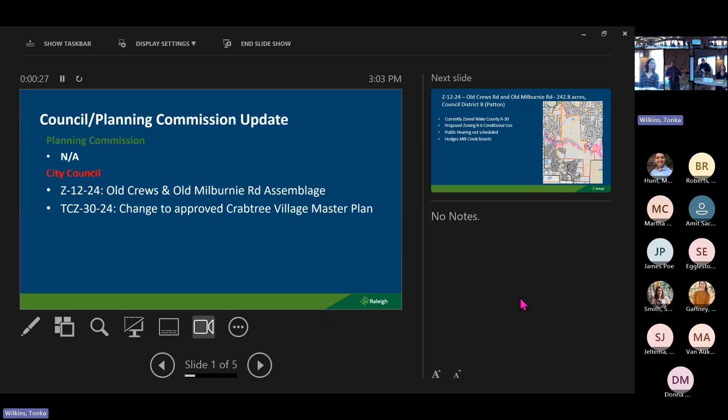I haven't seen the one we talked about last month. It's in the Falls Lake watershed, so that's on our list as far as either planning commission or city council. But the first one, Z-12-24, is just a large assemblage of land. I think it'd be nice to put on the commission's radar, it's about 240 acres. We don't want to see something like that happen without oversight. The other one is a change to an approved master plan, likely a zoning case with more conditions, which is right behind Crabtree Valley Mall.

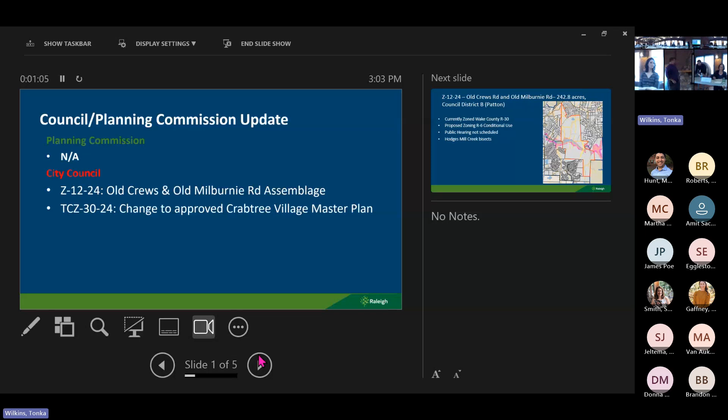So the large case in East Raleigh is off Old Crews Road and Old Milburnie Road, 242 acres, in District B, which is Councilor Patton's district. It's currently zoned in Wake County, so it would have to be annexed as well. Their zoning designation is about R30, which is based on 30,000 square foot lots. The public hearing has not been scheduled.

It's supposed to be scheduled for the first public hearing in March, but the applicant asked for that decision to be deferred to the next council meeting on the 18th of February. So it could be scheduled sometime in March, but it'll probably be an evening public hearing. There's a large creek, Hodges Mill Creek, which bisects the property and has a lot of floodplain, along with some other streams coming down.

I just want to bring this to your attention. 243 acres, nothing really to sneeze at. I think we're going to have issues with fire coverage and things like that, not necessarily stormwater issues, but we wanted to put it on the radar.

Question: where is that within our urban growth boundary? I believe it's in the eastern growth category because it's still ETJ, in the county. I think they just finished a study on it last year, part of that eastern growth pattern study. I'm not exactly certain, the southeast study, because it's on the northern portion of the southeastern side. It's within the UGB.

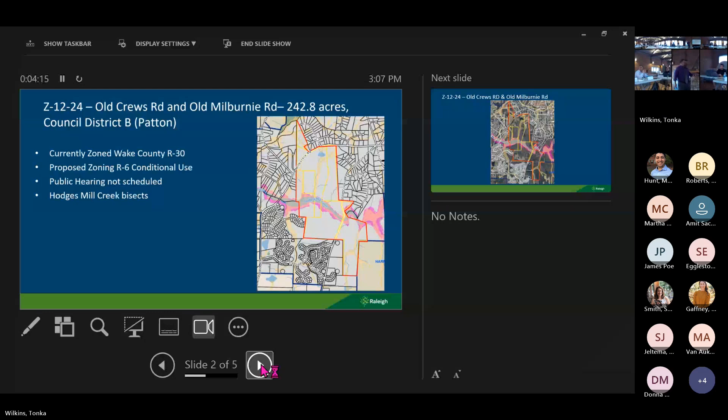And there's some changes in the retaining walls, which is driven by the site. They have some pretty impressive retaining walls out there driven by that Homewood Banks area, but they are tiering the new retaining walls to be no higher than 10 feet and setback, and another one about 10 feet high.

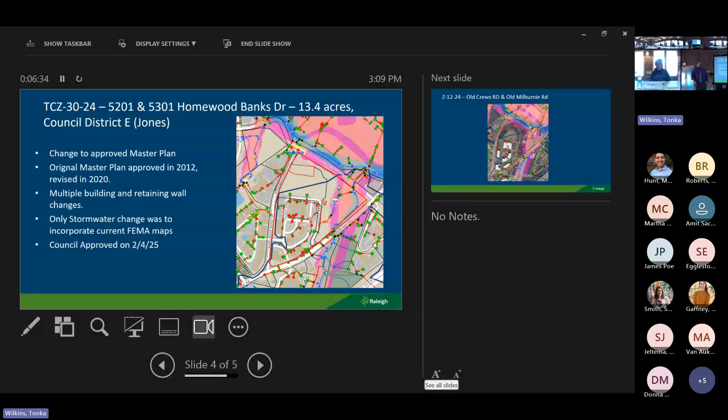Just the aerial portion - you can kind of see this on the upside. This is going to the stormwater box right here, and then we got the mall here, and looking down, house here, that's on the corner, Crabtree Valley and stuff.

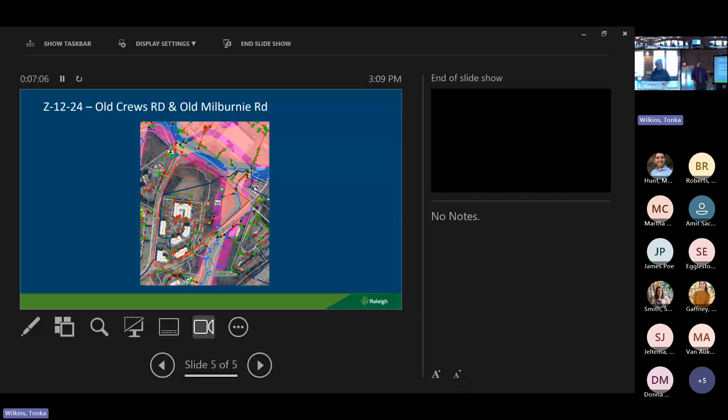We don't have any stormwater conditions now, obviously, since these parcels are currently vacant. There's a few parts that do have a little bit of development on it, so that may change some of the ones upper here. But obviously, if they leave all the stream buffers and the floodplain, I feel pretty good about it.

I'm guessing, but I haven't seen a site plan for it, that there may be some creek crossing here, just to kind of connect the northern and the southern portion, depending on what that looks like, assuming they just want one. Not sure what our opinion would be right now, without seeing it - the less creek crossings, the better. The stormwater street, that's what I'm saying.

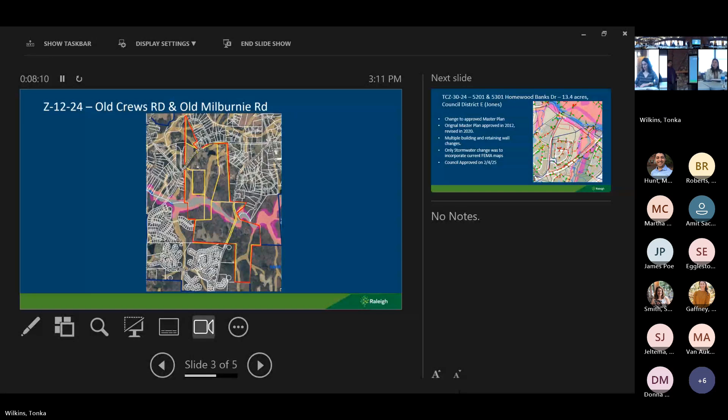Moving on, no stormwater staff updates at this time.

Moving to high priority topics, just a reminder that elections for the commission will be held at the upcoming March meeting. And Commissioner and Chair Taylor will be rolling off in April, so you would not be eligible for continuation as chair.

As an update, we are in budget session. As we explained at the January meeting, we gave you a preview of the budget process. We do have a presentation on the agenda today focused a little bit more specifically on the capital improvements plan process and projects. The presentation today is actually a preview of a presentation we will give to City Council at their February 18th work session - that will be a morning work session at 11:30, held right before their normal 1 p.m. meeting that afternoon. Then next month in March, we will bring back a more full, comprehensive overall budget presentation, including recommendations related to rate increases and other changes and so forth. So that's just kind of a preview of coming attractions.

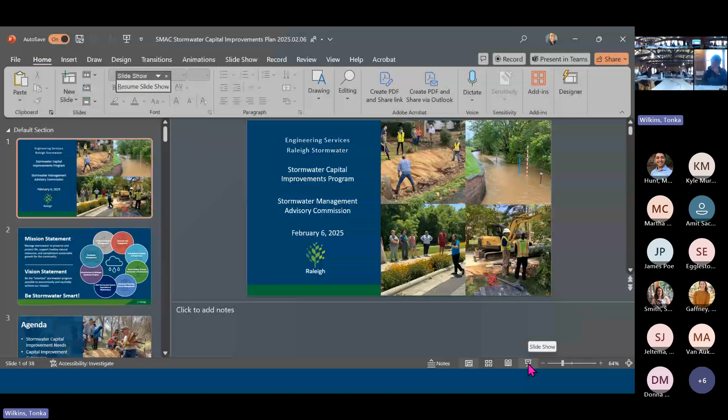Just one comment on the setup - it's a little different than it's been the last couple of months. Staff did pull one from the modified consent agenda to answer questions, and that was the one we pulled. So how we set it up in the memo is: the modified consent agenda consideration for these three, which were deemed as all operating or all presented under the nitrogen metric, all fairly typical projects, and then staff would pull that one to consider separately and provide some additional information.

Is there a time restriction, as far as if an applicant does something in one year, must they wait a calendar year for a separate project? Correct, there is a cumulative threshold over two years. If somebody wants to do a project at the staff level, and cumulatively over two years they did several projects, we would have to bring it to the commission for review as a second project. That's a rarity. In this case, Phase 2 did complete the rain garden prior to approval, so we want to point that out.

So this is just a broad overview of our watershed history, regulations, and everything else, just to give everybody some background. We've had a lot of talk about projects and rezoning cases that are in watershed areas, so this gives a good baseline. The agenda will go through some of the history in Raleigh, our current regulations, and some future considerations to discuss with the commission moving forward.

First, the history in Raleigh: watershed regulations direct a lot of this. Our main stormwater regulations came into effect in 2001. From 1792 to 2001, Raleigh developed as much as they wanted to, and then we finally started to rein that in. Sediment control came first in 1974 as kind of a stormwater regulation for us, and then in 1978 we took over flood regulations, which kicked things off. The watershed regulations came next, before we got to any major post-construction standard.

I put the water supply watershed first even though it wasn't first by timeline, because it's our drinking supply, it's our water supply. The current regulations, in the form we know today, started in the early 90s, passed down from the state of North Carolina, which designated this area a watershed to be regulated.

Yeah, so for Falls and Swift, they actually have a 40% forestation regulation. I'll show you the next slide — that could be a little bit of a problem, we'll see a little conflict, but I'll be able to explain. So yes, there is a forestation requirement that's not required on other properties.

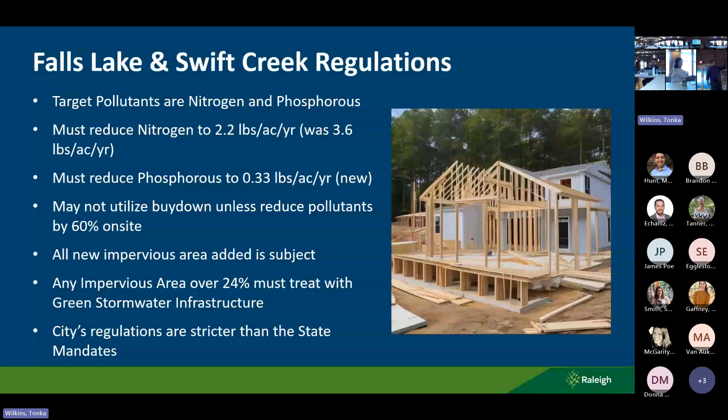So there are a little bit of differences, not exactly the same. In Falls Lake, the maximum impervious for properties is 30%, and there's no commercial zoning in Falls Lake. So 40% forestation works really well with 30% maximum impervious. There are designated areas that involve percentage, so that's where the map gets a little tough with the 40% forestation.

And there's no zoning allowed like that on Swift Creek — essentially Swift Creek should have had just a separate version of the map. Each community has their own high density areas in Swift Creek, but the overall high density area for the whole Swift Creek watershed can't go above 5%. So each community got a piece of that 5%. Raleigh's is close to South Saunders Street, that area — the committee calls it the development area. Those are just the designated areas that get a higher percentage.

It's essentially impervious, but there is commercial property or commercial zoning allowed where they can see that. Unless I learned wrong, churches and schools can be built under residential zoning. So churches and schools in Falls Lake are built under residential zoning even though they look like commercial, but they still have to stay out of that area.

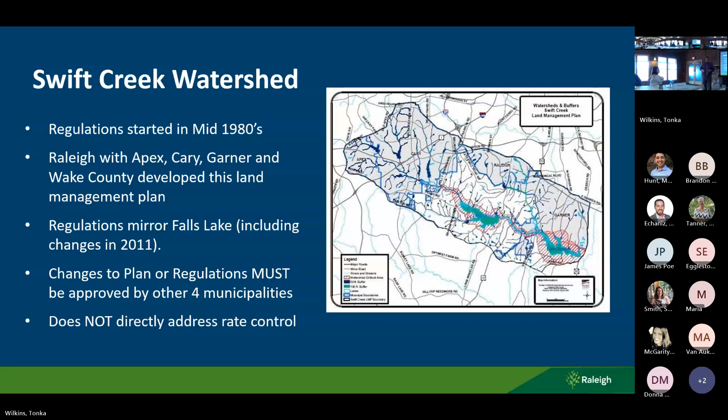Both areas also have to comply with the rate control ordinance. That's a different part of the code since we enacted it in 2000 — the 2 and 10 year regulation, if they're upstream of structural flooding they'd have to go to higher rate control and things like that. So that's a little bit different from the nutrient control requirements. Just FYI, the nutrient control that Falls Lake and Swift are doing is higher than the standard nutrient control minimum, but they still have to do rate control.

They're both primary and secondary watersheds — they go up to 24% impervious without treatment. In the primary, you can go up to 50% impervious with treatment; in the secondary, up to 70% impervious with treatment. That's a lot to say.

The big thing to remember on this slide is the last bullet here, your exemptions. Single family detached dwellings that were recorded prior to the regulations becoming effective on October 12th, 2008 — the first time we came to a hearing — are exempted from those regulations, and that covers 90% of the residential lots in that area.

And I have this little sign in my office — it's been there for almost 17 years now, from one of the public hearings where they passed them out. I didn't wave it at the council meeting, but they gave me one.

They're not held to the Falls Lake standard for nutrients, they just have to do our overall use space and nutrient standard. So it's the most flexible water supply watershed area, but it is not without issues. A lot of homeowners, as you can imagine, back in 2008, were very upset—they bought this property 10 years ago, and then we told them they can't build that. So it's quite tough.

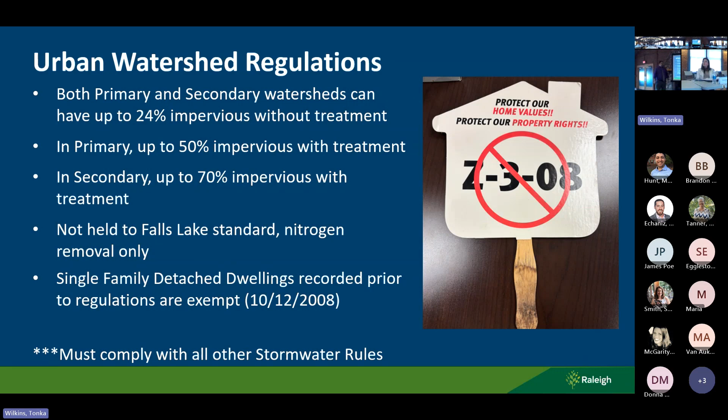Looking at future considerations, there's obviously a lot of development pressure in this area. We're seeing an increase in zoning requests overall, and there's a housing deficit in Raleigh. Also, to pick on the Swift Creek Land Management Plan, there's a lot of talk in that plan about density versus impervious area. Most of the communities in the Swift Creek Land Management Plan have ordinances that deal with impervious area, and a lot of comprehensive plan policies talk about density.

The ordinance is really where the rubber meets the road for permitting. So should we allow higher density in a watershed area, but it still meets that 30% impervious purpose, for example—which I think is something we talked about with that last fall's case off of Strickland Road. And this isn't just an isolated issue—Garner is feeling this, Apex is feeling this, Cary is feeling this, Wake County is feeling this, and also Falls Lake as well.

So two things to think about: increased treatment options. You've got the GSI option now—are there other things out there that we can do? Should we lower that percentage threshold before you have to start doing GSI? Because in Falls Lake and Swift Creek now, if you go above 12%, you have to have stormwater treatment. Right now we give you until you hit 24% to do GSI, so I think that's high.

You all understand this, but the budget process is a really important part of our mission and vision. We need to make sure that our level of service is set to meet the needs of our community, and that our budget is set appropriately so that we can effectively, equitably, and economically deliver on that mission. So be stormwater smart is in the back of our minds in all ways.

This is going to be a big fiscal year for stormwater. We've been talking about this now for a few years. Fiscal year 26, which starts July 1st of this year, will be the first time this stormwater plan issues debt to support our capital improvements program. And that gives us so much more flexibility in terms of the size and types of projects that we do. Up to this point, we have only been able to spend in any fiscal year the amount of what we call pay-as-you-go or pay-go capital improvements for that year.

Using debt, I believe, is actually a fairer way of paying for capital improvements. If you think about it, we put in a pipe or we repair a dam. That is going to last 30, 40, 50, hopefully even more than that years. Why should ratepayers that are here today have to be the only ones to pay for infrastructure that is going to last for decades? So by using debt that is paid off over, say, 30 years, it spreads out the burden of the cost of that infrastructure over people who benefit over a much longer period of time.

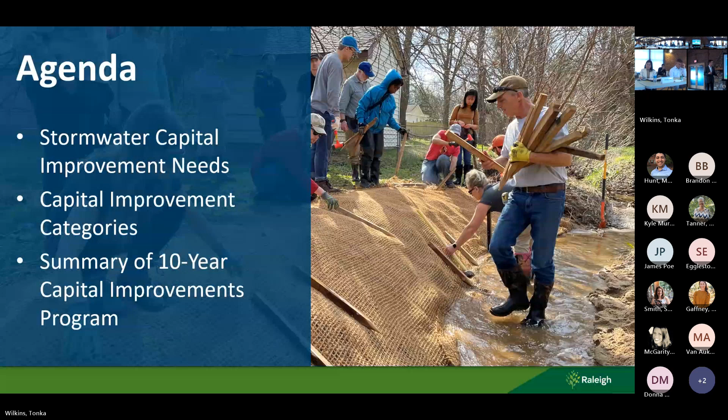So I do think that the debt service model of funding infrastructure is a fairer way to implement our CIP for our community. So here's the agenda. We're going to talk about the capital improvement needs, the process that we use - and when I say we, I mean mostly Barbara Moranta is going to talk about that. We're going to talk about the categories, and then the summary of the 10-year forecast that we typically produce for our capital improvements program so that we can plan ahead for budgeting and rates. And with that, I'll turn it over to Mark.

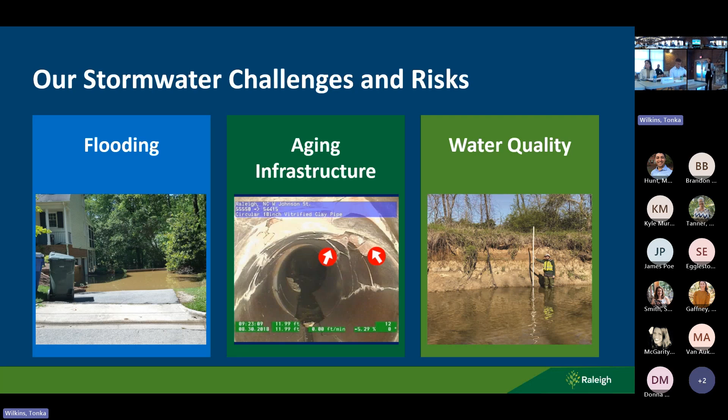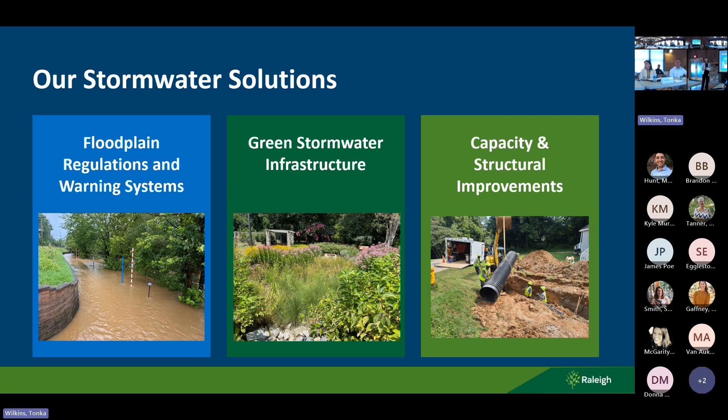Okay, so we already have a lot of challenges. We have flooding, we have aging infrastructure, we have stream erosion contributing to water quality concerns. We have a lot of different programs to increase resiliency in the community, protect public safety, and improve water quality. We have a lot of work to do. We have $920 million of known capital needs. And as Wayne said, we're using a pay-as-you-go strategy, and with our current budget, it would take us almost 66 years to deliver our known needs, and that's a long time. So we're trying to accelerate that with the financing and grant strategy.

The rest of this presentation is to talk more about the different programs in stormwater, the different pieces of that pie chart - where these projects come from, how they're generated, and to go through some examples. If you have any questions along the way, please ask. And the first piece of the pie, we'll start with the biggest one: major capital projects.

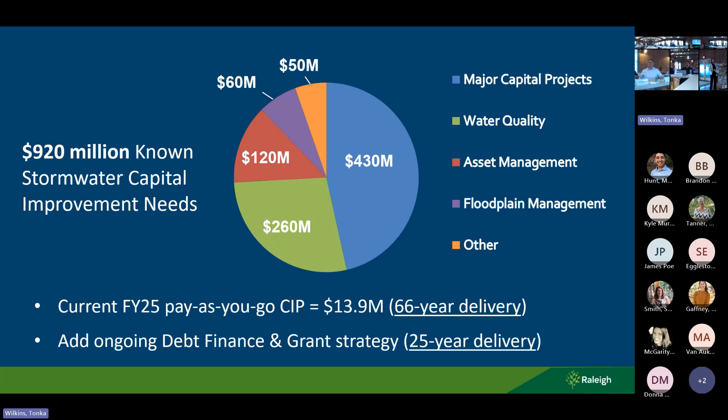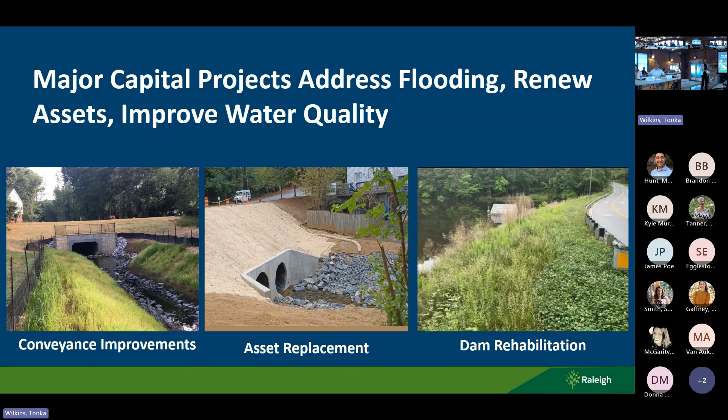Major capital projects address flooding, renew assets, and improve water quality. These are our larger projects like neighborhood drainage, conveyance improvements, big asset replacement, dam rehabilitation. A lot of these are identified through a watershed planning process.

We had a presentation on that in the past. We talked about the process of watershed studies, all the way from data collection, analysis, and defining projects. A lot of our watershed studies were done a number of years ago, and they're being updated now - we started updating them about 4 to 5 years ago. So as we do that, we're taking all our new known capital needs and replacing the old with the new. And I want to point out that one of the big things we changed in the planning process was community engagement. We didn't have that before, but we've added it to every phase of watershed planning.

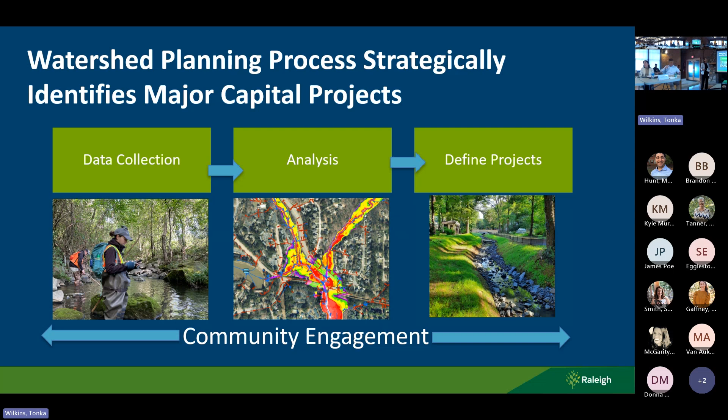Our goal with this engagement is to equitably engage the community. We want to make sure that the people we're talking to when planning these big projects are reflective of the demographics of the community. We do that by incorporating best practices from the community engagement playbook that the city produces. We look at planning up front, like which stakeholders we need to engage in the process. We reach out with a variety of things - online surveys, public meetings, pop-up events in different areas. If we're not getting the representation we think we should, we go to pop-up events. And then we track the demographics to confirm that we're getting the representation that's important.

So that's kind of the big picture on how major CIP projects are generated.

A few you've heard us talk about before, for example Camp Pond Dam. This addresses a notice of deficiency from NC Dam Safety. The city has a road over the crest of the dam, a one-way in, one-way out road for a community of about 40 homes. There's a spillway under that road that's eroding and threatening the dam bank.

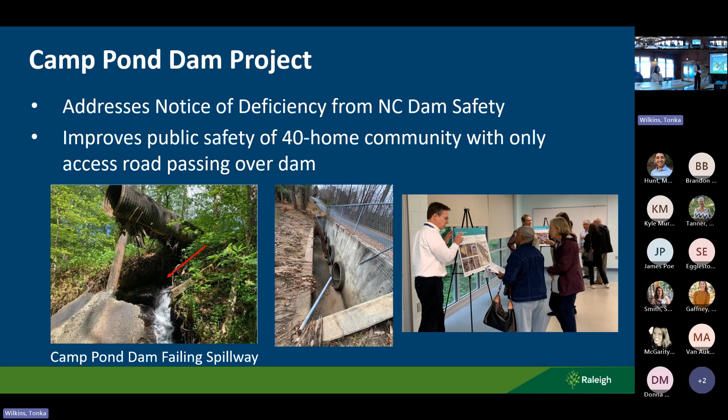So this project will address the notice of deficiency and maintain access to the community. Another project is the Rose Lane Safe Access Project. It's again a one-way in, one-way out road, but it floods frequently, about 1 to 2 times per year. This project is looking at access on that alternate access route.

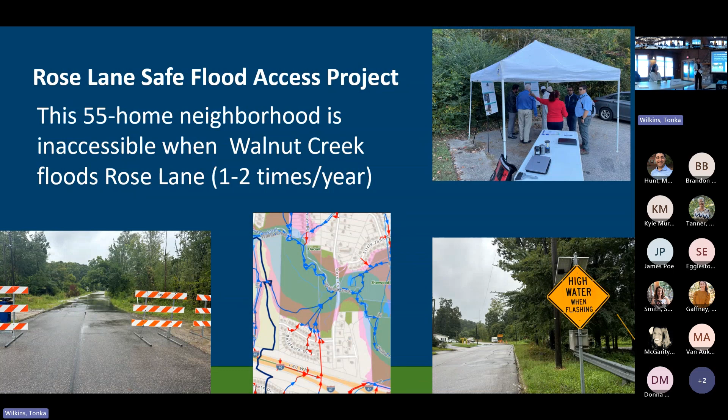Moving on to... yes, just a question on that one.

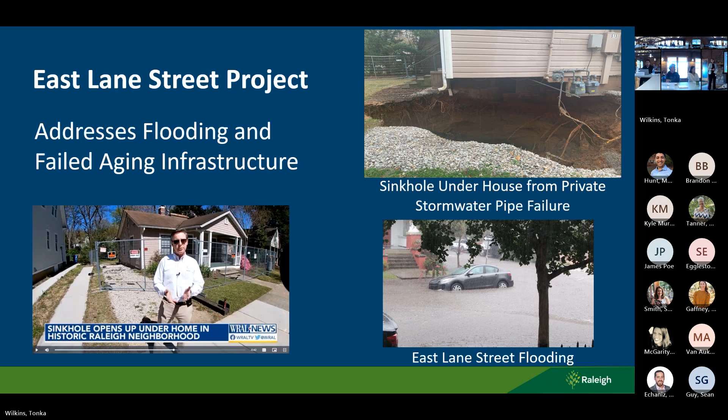I think it's... Okay, any other questions?

All right, so water quality. Stream and wetland restoration improves water quality and natural habitat. I wanted to show one example from Wooten Meadow Park, which is a wetland and stream restoration project off of Gilbert Road. This is a really great example - we restored wetlands in the park, a collaboration with parks. Wetlands are like nature's filter, right? They remove pollutants and sediment from the water. We also daylit, this is to your comment, a portion of the creek there that was piped.

So we took away the pipe and it flows over land that has floodplain benefits and water quality benefits. It's also an amenity for the community. You can see all the pictures people have taken at the park and posted online on iNaturalist. People are just enjoying the space.

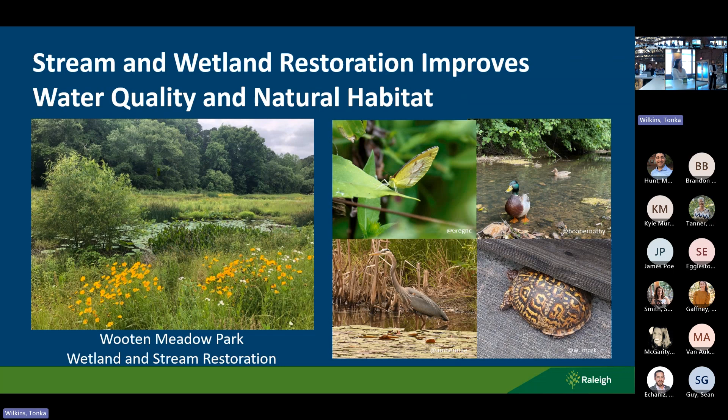Most of our projects have been on city property, and the ones coming up are, for example, Smokey Hollow Park downtown. This is stream restoration of 1,700 feet of stream on Pigeon House branch. This is the East Lane Street project, which also has constructed wetlands to improve water quality.

Also Worthdale Park in southeast Raleigh. This is stream and wetland enhancement, 2,000 feet of stream restoration. This project is going under construction around the May or June timeframe this year.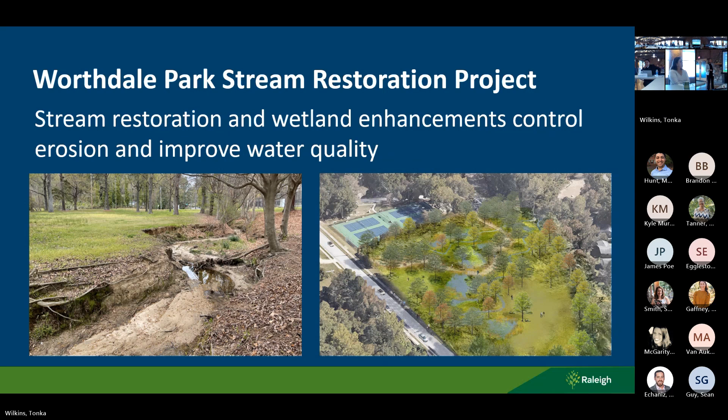And then Upper Durant, we're in Upper Durant Nature Park. The upper lake here is going to be converted to a stormwater habitat wetland. The driver for this was a dam. We're taking this opportunity to make some water quality improvements. Any questions on these projects?

Yeah, we mentioned some of these in different presentations over the years. Is there an online repository or database of those, like AGOL, or where what projects are going on might look like, just publicly available, to be able to link to that information?

He does have a database of projects in design and construction. I don't know whether it's public facing. But each project should also have a website.

Yeah, I've seen the project page, but I just didn't know if there was kind of a condensed area for this kind of planning, because if you don't know, you're just kind of looking at the neighborhood and saying, hey, what's going on over here? You're heading this way and see, just be a thing to see across the board.

Okay, that's a really good suggestion. Maybe that's something we could do on the stormwater side, if it's not already public facing on the city side, to help out.

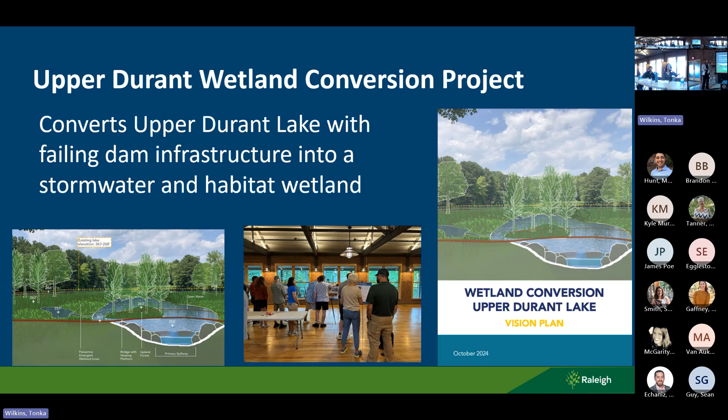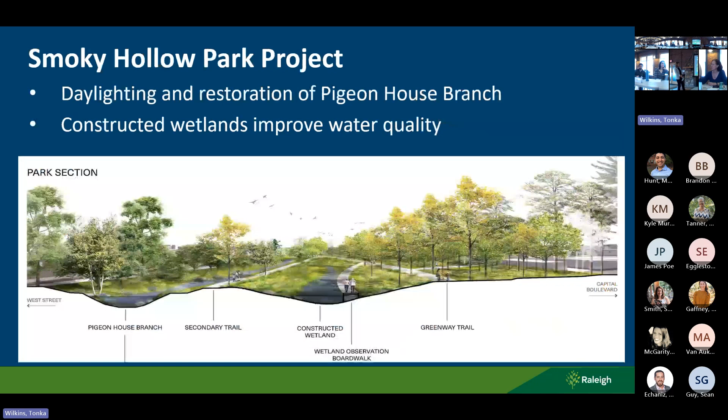You said that 40% of streams and creeks are moderate to severe erosion. Yeah, on the USGS study. Is that typical? Is it high for most lands? I feel like it's typical for urban areas, but I don't have statistics to compare to other municipalities.

That would be a good idea for us to add to our impact. And this is, to my knowledge, the first time an analysis like this has been done. We helped co-fund this with USGS, and it's really an innovative technology using LiDAR to gauge stream restoration and degradation. We have LiDAR over a period of time, so we can see the elevations, and we can also see the rate of change. This is something USGS is doing for the first time nationally.

So it's hard to answer your question because there really isn't a lot of data in other municipalities similar to this, but I do know USGS is interested in expanding this technology and using it elsewhere. You have to compare a lot of other factors too, like the age. Yeah, the streams are constantly eroding, right, it's all relative, how fast it's happening.

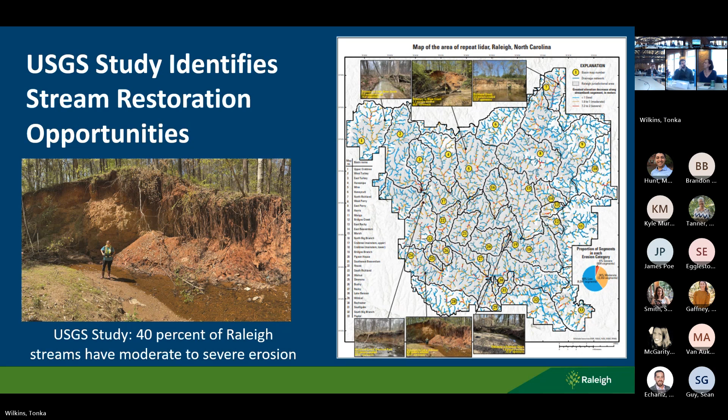Moving on to green stormwater infrastructure, or GSI. GSI brings water quality, heat mitigation, and wellness benefits to the community. Here's some examples of GSI we've installed throughout the city. Traditional gray infrastructure is designed just to take that water and move it away from buildings as fast as possible. What GSI does is it's designed to fill up in rain events. So instead of moving the water away, it lets it infiltrate, lets it spread out, and slows it down. It's a great amenity, you can enjoy the plantings in the green space that helps mitigate urban heat.

So we do have a lot of opportunities in our portfolio, and stormwater provides funding for GSI on other city projects. We assist in design and construction of GSI for parks or roadway projects, for example, or vertical construction. Two examples of projects coming up are Gipson Play Plaza, which is opening in 2025, that's GSI, that's going to be exciting, and we'll do a tour with you all once that's open. And then the green roof areas of the Civic Tower, the Silva Cell Civic Tower, which is currently started.

And also with SMAC support and council support, we now have started the GSI maintenance group, housed in our parks department. So it allows us to maintain these devices after they're constructed.

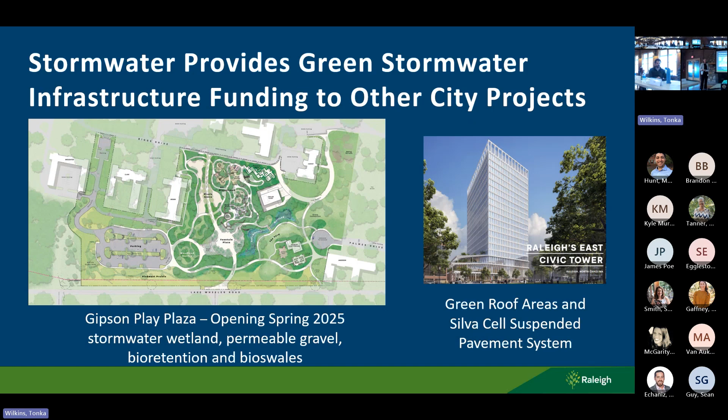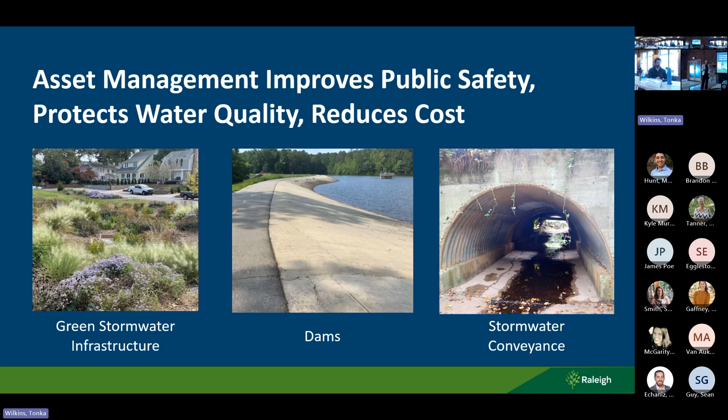We appreciate that. And that brings us to our next category, asset management. Asset management protects public safety, protects water quality, and reduces costs. We have 3 different asset management programs: one for GSI and stormwater control measures, one for dams, and one for stormwater conveyance. We maintain over 140 stormwater control measures at GSI, inspect over 25 dams, and over 680 miles of stormwater conveyance. The point is to go out and do proactive inspections and catch problems while they're small. It's easier to pay for small repairs than to wait until they become a big emergency. So this group goes out, does inspections, and decides where we should invest to maintain our infrastructure.

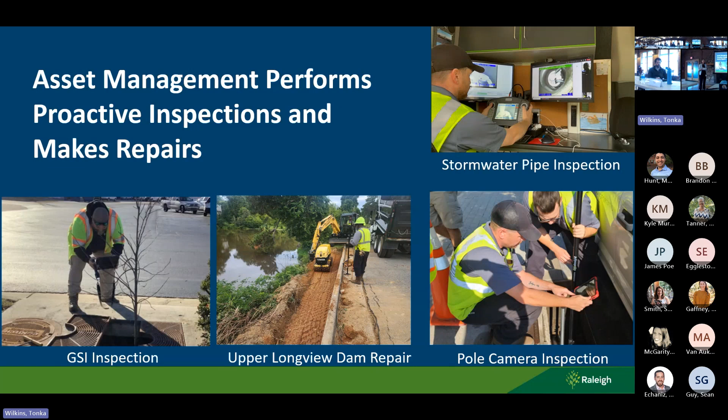An example of that is a pipe rehabilitation project. This is the first year we're doing it, and we have to do it annually. So we're identifying pipes with defects and doing a lining project. We line the pipes and fix them, so we don't have to dig down later when they become an emergency. This is an example of the lined pipe, and it's more cost effective than digging down. It requires less equipment, protects other utilities, and replaces pavement. So this is less invasive.

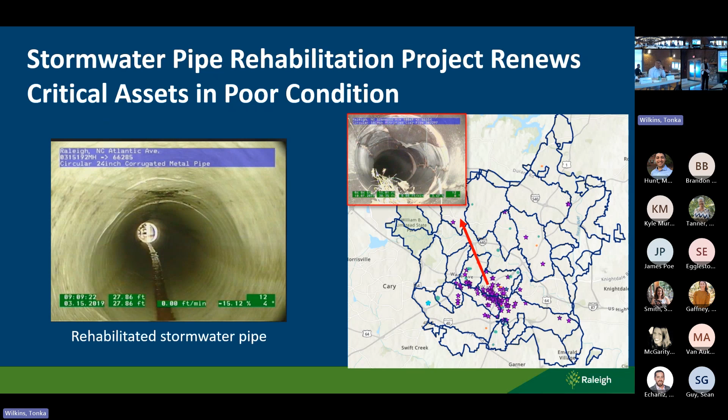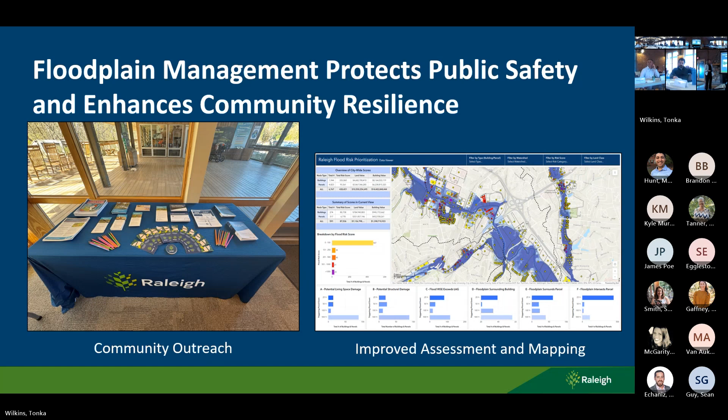All right, floodplain management. We heard from Ben's group last month, and they did an excellent job. Floodplain management protects public safety and enhances community resilience. As we heard last month, this group is working on improved mapping to assess flood hazard mitigation risk, to determine where people are at risk for flooding. Kind of in hand with that is community outreach, to tell people where they are and how to prepare for something. This program area also does planning studies for areas susceptible to flooding, to make them more resilient. And there's voluntary flood hazard mitigation, so if a structure has been flooding repeatedly, there's an option where the city, with some support from grant funding, can purchase this property.

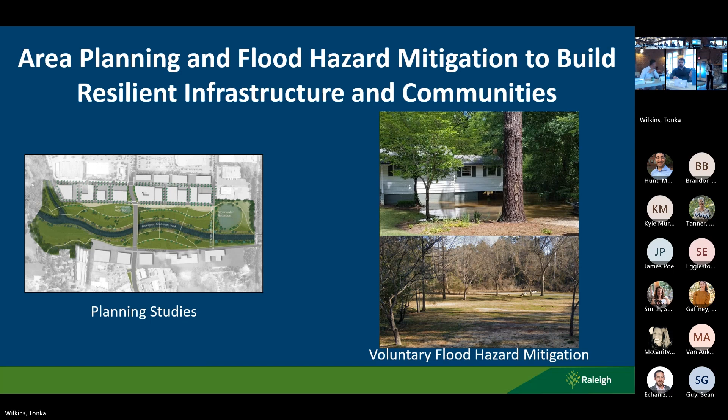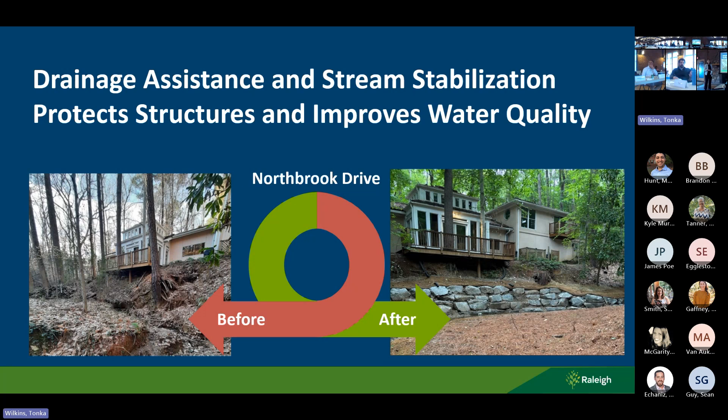What if there's some catastrophic event or emergency with stormwater infrastructure? Do you have to reconfigure them? Yeah, that's a good question. If we, for example, had a major issue—we've inspected, say, 30% of the underground stormwater pipes, but we haven't inspected everything—if we come across something that's an emergency, yes, we do have to update that in our budget. That would fall under the asset management category, or if it was big enough, we would make it a capital project, adding to our capital needs. So it's sort of a contingency plan. Yeah, we can fit that into this again.

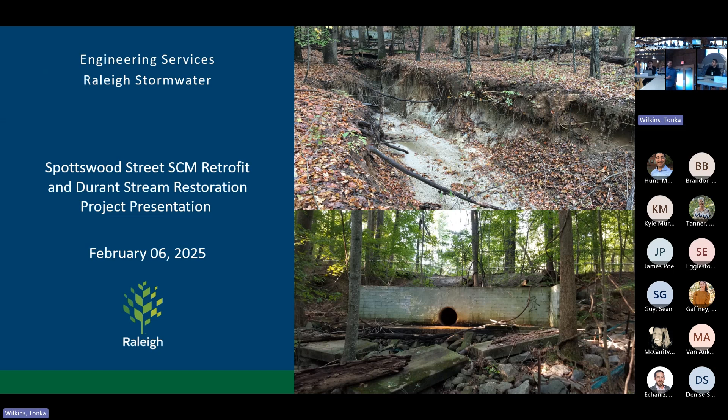So we're doing work to retrofit that and then repair the downstream stream channel. We just received and awarded, this past Tuesday, an acceptable construction bid. The bid came in at about 1.6 million, so that'll be funded 1.4 from our CIP group, and we also have a $200,000 NCDEQ grant for that construction as well.

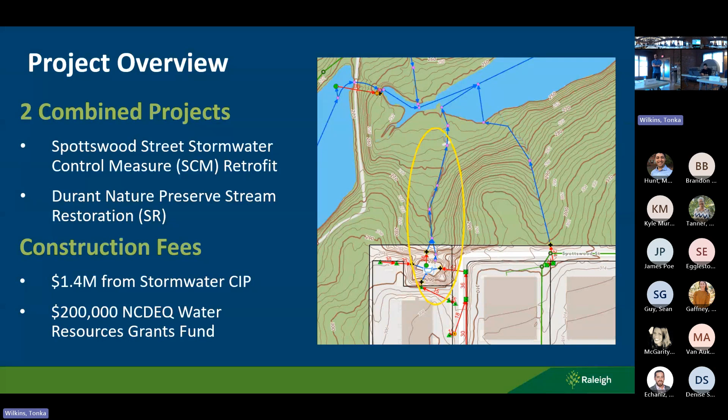So the more detailed map, there's a picture of this in the back if you want to check it out on the way out. Again, this is the lower lake, this is our SCM, this is the stream we've been working on. Part of the construction limits are outlined in white here. The yellow lines are trails used by the public, one trail is going to have to be shut down. There's a component where, as part of the stream work, we're installing some pedestrian bridges, so there's some new trail amenities as part of this project.

We'll have some lane closures, as you'll see if you're familiar with this area at all. It's highly industrial, there's public traffic with 18-wheelers and stuff, so there are some traffic control measures there.

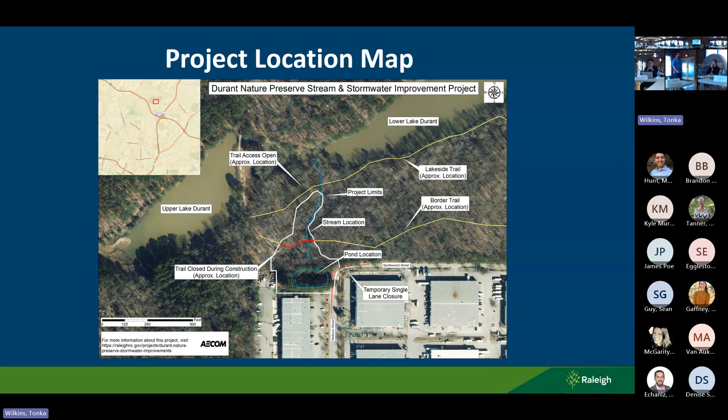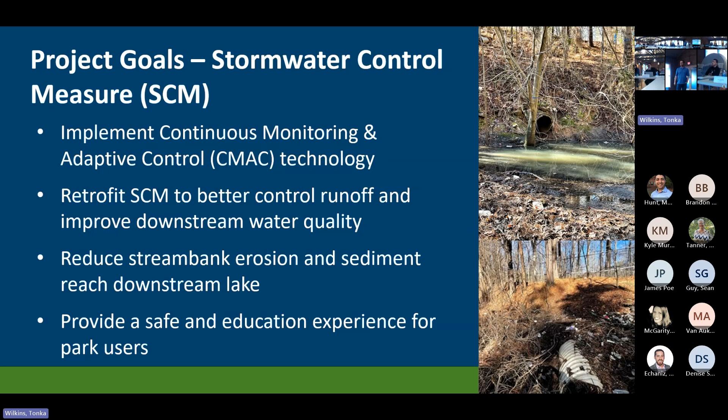So the goal of the project is to retrofit and better control runoff, improve downstream water quality, and reduce downstream stream erosion. You can see this thing gets short-circuited and bypassed during large events all the time, and it's really pulling out the stream downstream.

Similar goals on stream restoration, some of these photos are pretty out of date after some of the storms we got this past year. That stream channel is changing every time I'm out here, more tree falls, more erosion, the gully that's formed has gotten more severe, it's actually encroaching on the existing trail. So again, we're trying to reduce sediment that gets down into the downstream lake, improve water quality downstream, as well as improving park aesthetics and things.

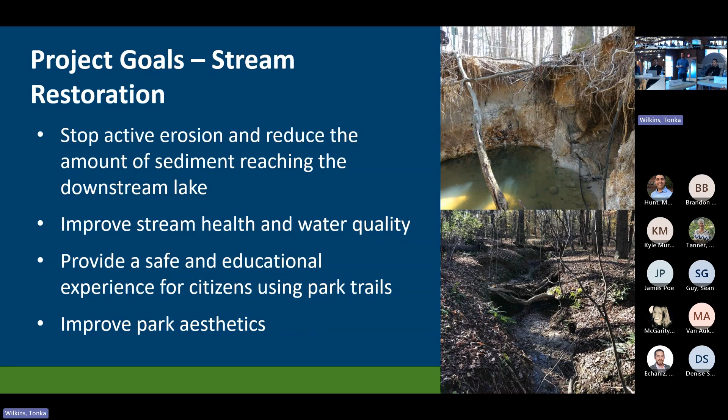It's kind of a sketch, this isn't quite our 100% plans but still pretty close. So this is the proposed footprint for the SCM. We've got two inlets coming from all the drainage in the industrial portion of the map here, a couple of forebays to allow us to capture some of the sediment and provide maintenance there, and our primary outlet pipe and overflow spillway. So there's going to be two different channels at the downstream end, which is the pond.

Vegetative shelf around the pond - we had to go through some specific design exceptions for this part of the project, just because it's older and wasn't built to our current standards, so we're trying to essentially fit something into a really tight space here.

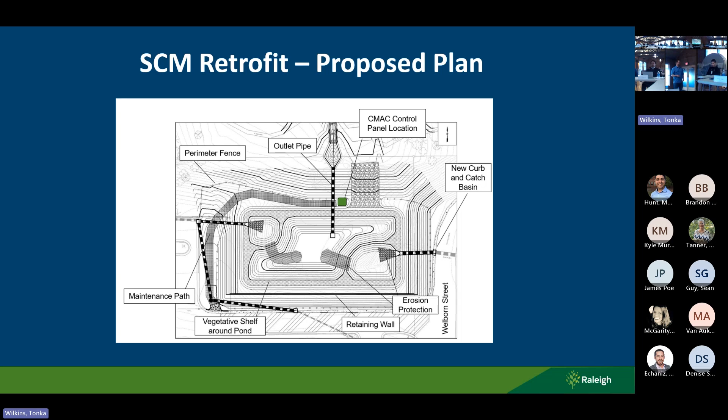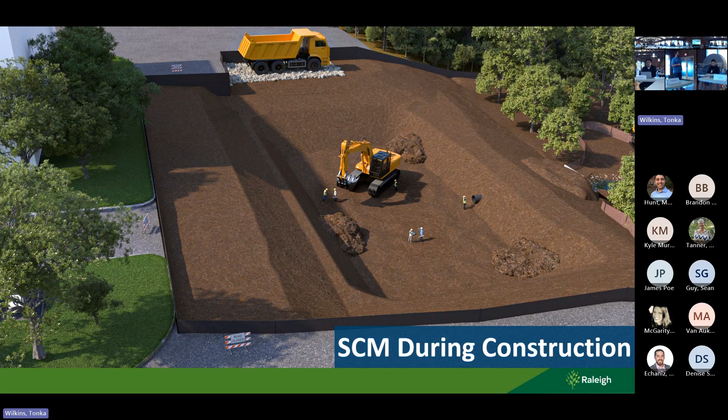It's challenging. These are some of the renderings our consultant pulled together that we provided during public meetings, to give you an idea of what to expect during construction. A big hole in the ground, then afterwards a vegetated shelf, with a couple of bays or riser access to get in and scoop out the sediment, do maintenance and plantings. And then our solar panel for the control of the CMAC system.

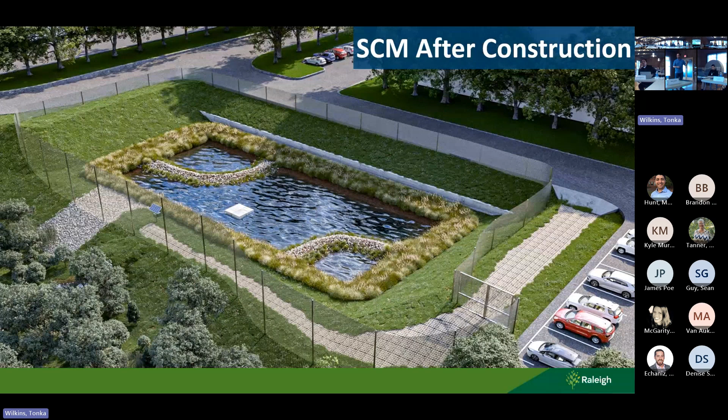For the stream restoration, similarly - this is the downstream end, the lake is over here, so we've got our primary channel here. This will actually be all new. This might be a little hard to see, but the gray outline here in the background is the existing channel. Tighter lines mean more erosion, so this is a pretty gullied channel at this point.

They'll actually form and construct this offline separately, use some of the fill material to backfill on this end, and then use that channel from the primary spillway as sort of the overflow when we get those larger 100-year kind of storms, tying into a more stable point downstream. There's also a diversion structure that allows for relief on the other side when the main channel gets overwhelmed. These are typical cross vane structures.

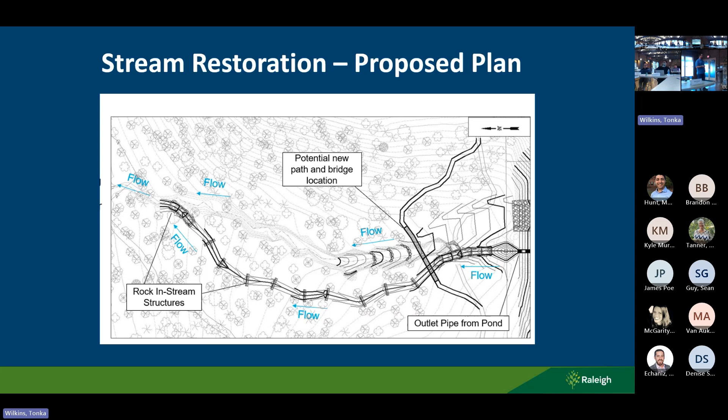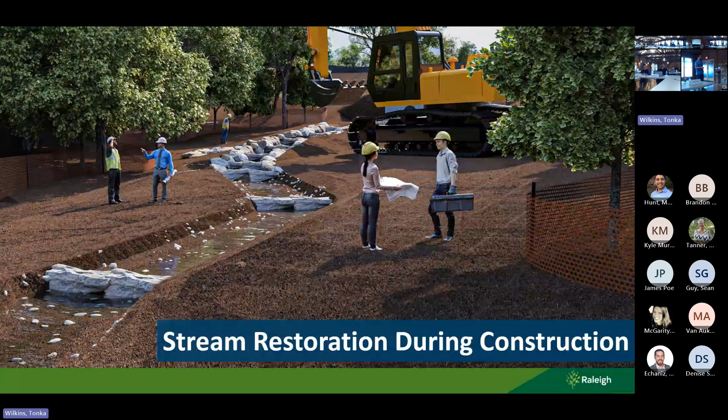Same thing we talked about before - some renderings of what to expect and what it'll look like. There'll be tree clearing, but tree protection fencing throughout, a lot of notices marking trail closures, trying to cover that area, and some of those rock features I was talking about, cross vanes, to be installed.

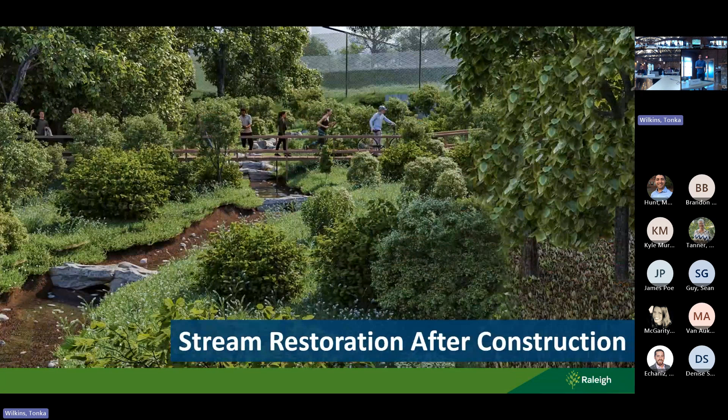I think one of the hardest things for folks to conceptualize with stream restoration is when you're done with the project and walk away, it tends to look like just that. Since this is a very heavily trafficked public park, I think it's important to reiterate that these things take time to grow up. You've got sort of an emergent structural phase, and you eventually get back into older, more mature trees over time.

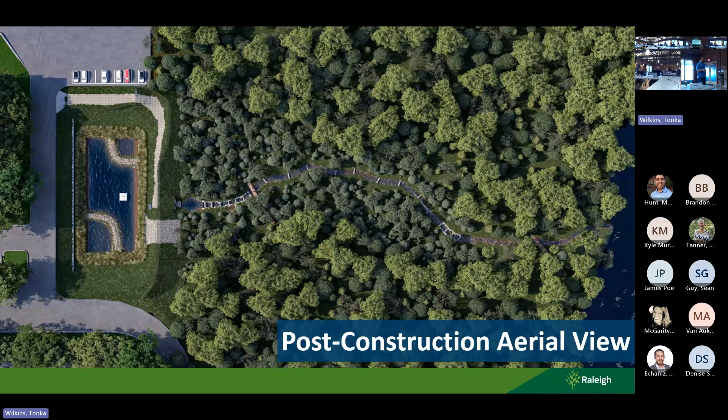It's just an aerial view, and this is us - that's our channel here.

So next steps - just two days ago we went to council and got awarded the project to our apparent low bidder, Fluvial Solutions. We've worked with them on other projects, I think they're really good at this kind of work, so we're excited to work with them. We'll be developing contract documents with them over the next couple of weeks.

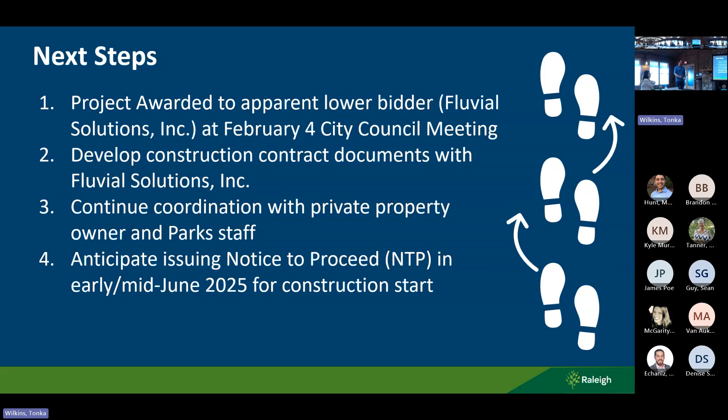Continued coordination with private property owners and park staff. There will be some public notice - emails, postcards, that kind of thing - that go out to folks in the neighborhood, as well as working hand in glove with park staff to notify them when we need to close trails and what to expect in terms of disturbances. We anticipate construction starting roughly early to mid-June. So not too far off.

Thank you. I have a question. Yeah, go ahead, Sean.

Oh, so the lakes - were they originally here for flooding mitigation or? I don't think so, I think it was recreation. It was a Boy Scout camp, and I believe they were primarily built for recreational purposes to support the camp - fishing and things like that, yeah.

Parks and Rec has a summer program out here, right? They do, yeah, there's a lot of programs that take advantage of this as a nature preserve. And that's a designation that's different than many other city parks - it's officially a nature preserve, so that changes the mission slightly, from a park more to focusing on the habitat.

And that's why, when the upper lake dam failed, the decision to not just put it back the way it was was a very carefully constructed one. It got a lot of input - Parks was obviously involved in the decision to change it, to not have it be a lake but more of an aquatic wetland type of habitat, which fit well with the nature preserve concept, because it's going to bring new habitat and new wildlife types into the nature preserve. It'll also have boardwalks and access to take advantage of that.